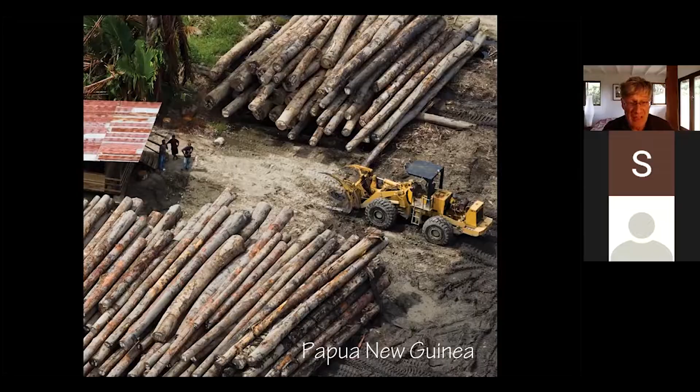We all know about these unstoppable bushfires that are wreaking havoc through the Russian boreal forests, even in the coldest parts of the world, the Amazon rainforests, our own Black Summer eucalypt forests, and America's West Coast conifer forests. Together they combine to add 20% to global greenhouse gas emissions at the moment.

Far too much of the structural and architectural timber that we specify or we use in Australia is sourced in ways that directly and indirectly feed this terrible spiral of global heating, desertification, and forest demise. And then there's also the laundering of illegally harvested forest woods.

Now, I'd like to talk a bit about the forest types from where good and bad woods for your essential construction applications are sourced, where they come from. Let's start with timbers for structural framing and concrete formwork.

Over the past 5 years or so, our big chain trade and retail timber yards have, in on and off waves, shifted their supply of softwood framing timber away from fast-grown radiata pine, which is from temperate climate Australia or New Zealand plantations, and moved towards slow-grown Baltic pine or spruce, much of it from cold climate native conifer and broadleaf forests of Russia and the Baltic states.

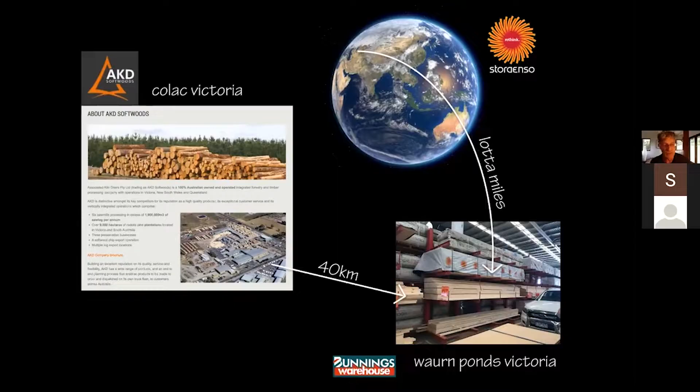The current rate of deforestation of Northern Hemisphere boreal forests, or the taiga, it's the largest terrestrial biome and carbon sink on the planet. This deforestation will have a catastrophic impact on our global climate if it continues. Unless the taiga is preserved to remain intact as largely virgin forest, this biome will soon become a net carbon emitter that alone will dwarf our ever-increasing human emissions.

By reducing tree cover, industrial-scale logging of the taiga accelerates climate change because the nutrient-rich forest soil decomposes under elevated solar radiation with that exposure. That releases carbon dioxide and methane into the atmosphere, which it does most dramatically in the most northern regions with permafrost. This then also impoverishes the biological and moisture profile of soil, slowing and compromising the return of healthy tree cover via natural or planted regeneration.

Repressed regrowth invites invasion of other species, providing ladder fuel for more frequent and intense wildfires. So it's a potent feedback loop of forest degradation and greenhouse gas emission.

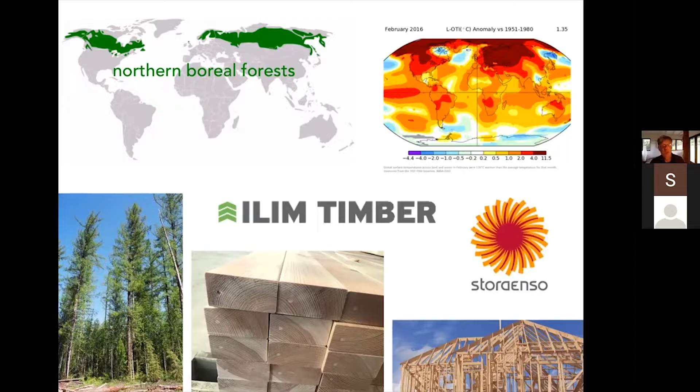Meanwhile, we've got millable radiata, pinaster and slash pine growing in vast, high-yielding plantations across cool and warm temperate climate zones of Australia, in all states and territories except the Northern Territory. And across the ditch in New Zealand, we've got millable radiata pine and Oregon that are grown to quality and quantity that dwarfs ours in Australia. New Zealand has a long and impressive history in silviculture, or tree farming.

Yet much of this millable wood from our region goes to wood chip due to global price wars and just-in-time procurement mantra. So guys, please insist that the pine delivered to your sites is from fast-grown plantations of Australia or New Zealand. Here's an easy-to-follow info sheet from the website for the Mullum Creek Eco Housing Project in Victoria. It'll help you and your suppliers distinguish between the good pines and the bad pines.

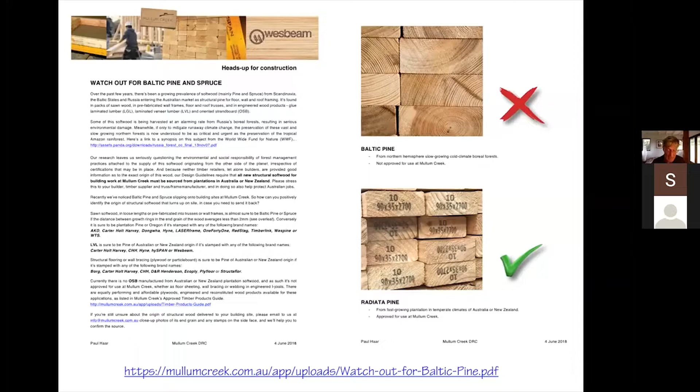Also, please do the same when you order prefabricated floor, wall and roof trusses. If your jobs are in Victoria, here's a Mullum Creek info sheet that'll help you with that.

Now let's look at engineered framing timbers: LVL, glulam, plywood for bracing, OSB and CLT.

These days, I'm struggling to see anywhere on building sites, in Victoria at least, LVL that's not from the other side of the planet. Your dominant Tilling Smart LVL, your Murphy LVL and Rigid Lam LVL are manufactured mainly from Oregon, growing slowly in a mix of cold climate native regrowth forests and plantations of the northwest United States and southwest Canada.

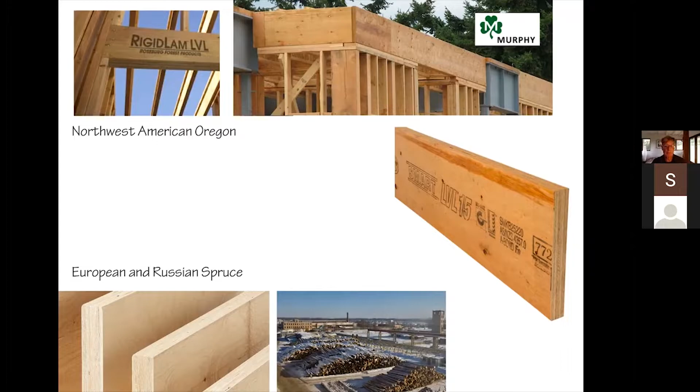Most of the rest of the LVL you'll see on jobs, Spec Beam, MT LVL and Ultra Lam, they're all Baltic pine, spruce or larch from Europe, the Baltic states and Siberia.

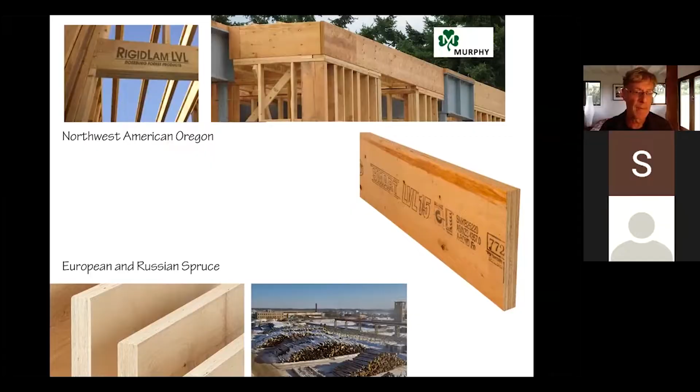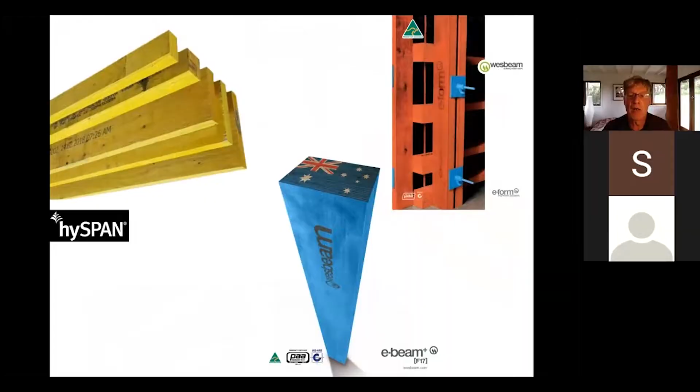Till now you might have seen the odd job around with that yellow LVL manufactured in New Zealand from fast-grown plantation pine, clearly branded as Hyspan LVL. But that LVL plant is now closing thanks to the global price wars I mentioned earlier.

For builders in southern Australian states, that leaves only Wesbeam LVL, which is manufactured in Western Australia from laminates of local plantation maritime pine and radiata pine, but now also, to lift its strength and stiffness, native forest karri.

That karri isn't from plantation, as Wesbeam's marketing videos would have us believe. I'm currently trying to encourage the other two New Zealand manufacturers of LVL, Nelson Pine and JNL, to supply

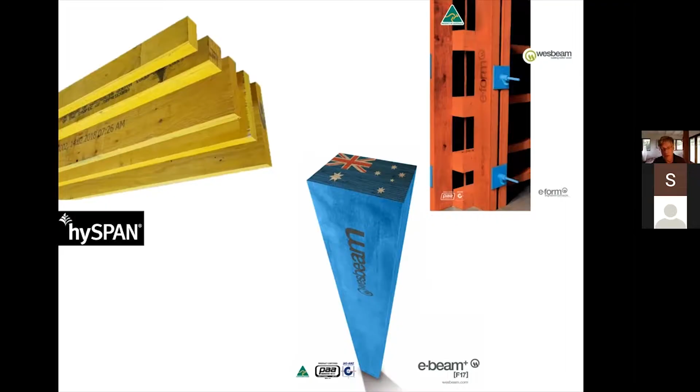pure plantation pine LVL, not only to New South Wales and Queensland, but also to Australia's southern states. But until then, Wesbeam LVL might be the best for you southern builders. Also, oddly, Wesbeam LVL products for concrete formwork, E-form and E-edge, are still manufactured without laminates of karri included, so they're perfectly good to use.

Have a look how beautifully LVL from local plantation pine has been used for this museum in New Zealand. It's a striking and huge building.

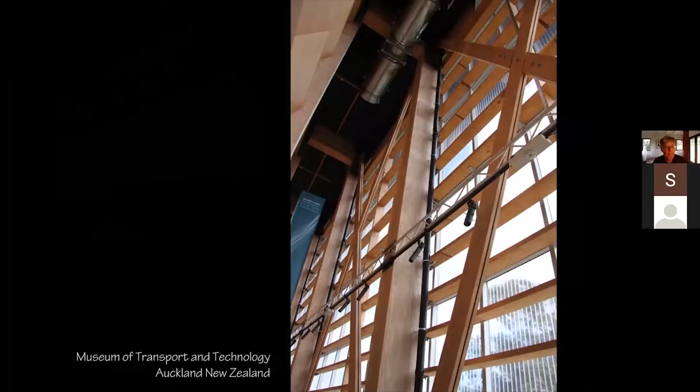For reasons I'll cover shortly, avoid glulam products from Australian native forests, eucalyptus and cypress pine. Obviously also avoid those from Northern Hemisphere Baltic pine, spruce and larch. Stick to glulam from Australian or New Zealand grown plantation wood.

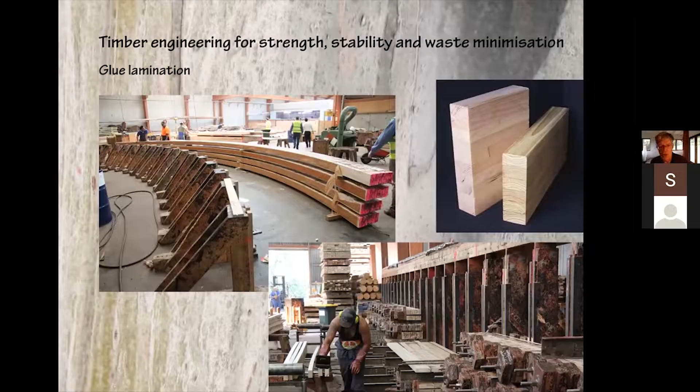There's now also a rapidly increasing amount of unbranded plywood for formwork, structural and architectural applications sold in Australia that's from pine plantations in Chile, and it's all unbranded. Aside from the carbon miles attached to its importation and the serious wildfires that these plantations have whipped right into major cities of that country, you could argue that these price-competitive plantation plywoods from countries with cheap labour are sustainably sourced.

But I prefer to go with branded Carter Holt Harvey Eco Ply, manufactured in New South Wales from local plantation pine, for floor cassettes, panel bracing and other structural applications. And Carter Holt Harvey Formrite, manufactured in New Zealand from local plantation pine again, for concrete form shuttering. The price is much the same in the scheme of things.

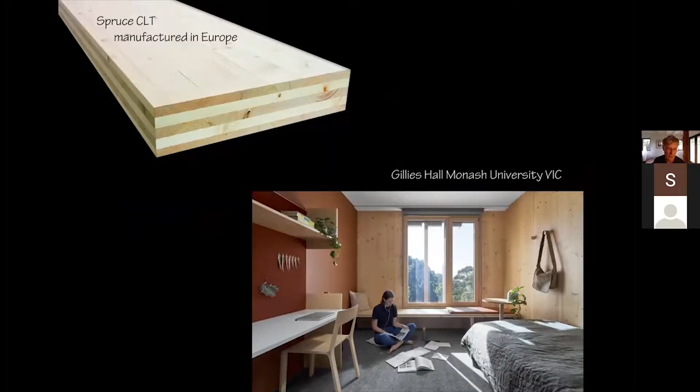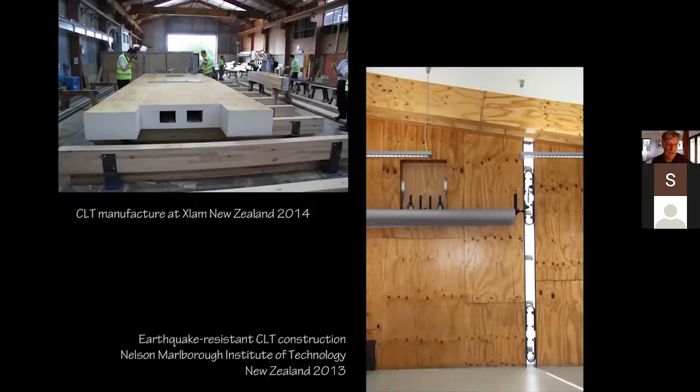Meanwhile, in New Zealand, companies like Xlam have for well over a decade fabricated CLT for sizable and impressive buildings from local, fast-growing plantation radiata pine. More recently, CLT plants sourcing local plantation radiata pine have been set up by Xlam on the Victorian-New South Wales border, by Cross-Lam in WA, and by CLTP in Tasmania.

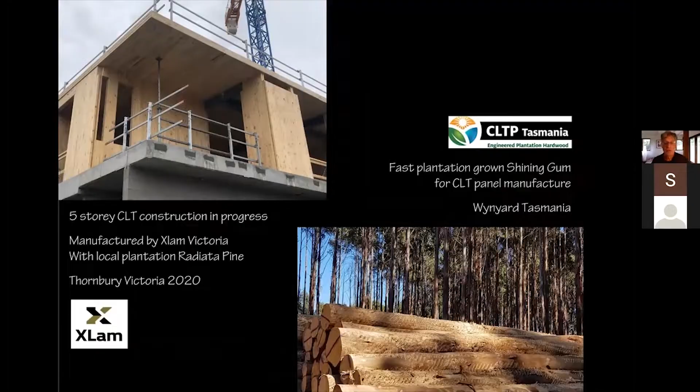CLTP and Timberlink are looking to source shining gum, or Eucalyptus nitens, to increase the structural performance of their CLT and glulam. This shining gum has been super fast grown in Tasmanian plantations in only 10 to 15 years and was originally intended for the fickle wood chip industry. This is a much better outcome, to put it into CLT. So going forward, please support CLTP for your CLT and Timberlink for your glulam if you can.

As builders, I appreciate that if and when a CLT project comes to you, much of the construction detail will probably already be locked in. But CLT builds that I see around the traps are too often also awfully wasteful in their consumption of wood.

If only the upper floor joists and the roof rafters were beefed up a whisker, there'd be no structural or thermal or any other functional purpose that I can think of to the CLT whatsoever. So if you can, don't let your clients and their architects waste wood and money in this way.

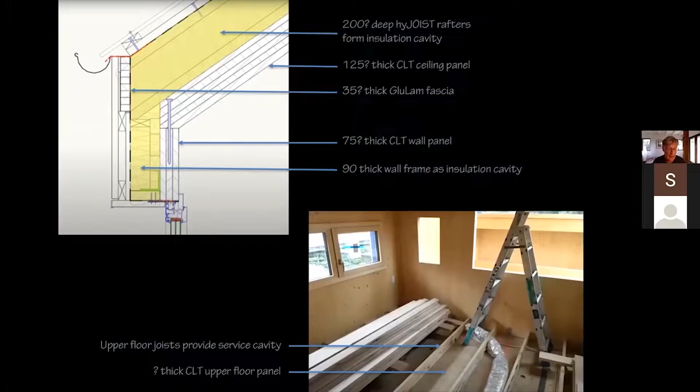For taller builds, where CLT has structural merit, most floor, wall and ceiling surfaces will be battened and lined to provide service cavities, insulation between thermal compartments, and a weather-resistant skin for external walls and roofs. So for a client who insists on the appearance of CLT in spruce, with those finer pin knots, stick with locally grown and manufactured radiata pine CLT with the fatter knots, and just pop over it a sheet of local plantation grown appearance-grade Araucaria plywood in a few spots where this offensive local pine might otherwise show up.

So to wrap up on structural timbers, for builders who deal with this, keep copies of this simple guide in your glove box. It's a green light and red light list of structural timbers available in Australia. It's regularly updated and lives on the Mullum Creek website. Share it with your suppliers, your frame fabricators and your carpenters.

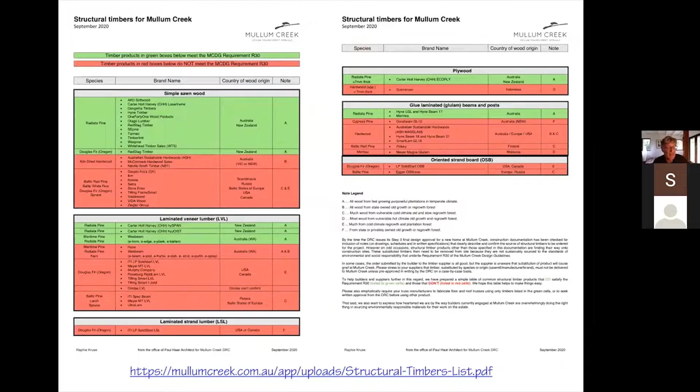Yes, local pine that I'm hoping you'll use for your structures is from monocultural plantations of exotic species, providing little biodiversity value over the prior grazing land they've occupied. However, I have a strong view that we should totally avoid sourcing timber from intact and cyclically harvested native forests, whether in Australia or abroad. That is until forest management operations there can be warranted under emergency environmental laws, which we need, to secure a net enrichment of local and global ecological and social health, patch by patch, year on year, employing new DNA and GPS technology to track each stick of wood from standing tree to stair tread.

You might ask, why am I so radical and uncompromising in my view? Well, it's because we are in an emergency in which the health of our native forests absolutely needs to take priority over any economic or business objectives. There are some eminent climate scientists now saying that protecting these forests may be as crucial to our near-term survival on this planet as stopping our use of fossil fuels.

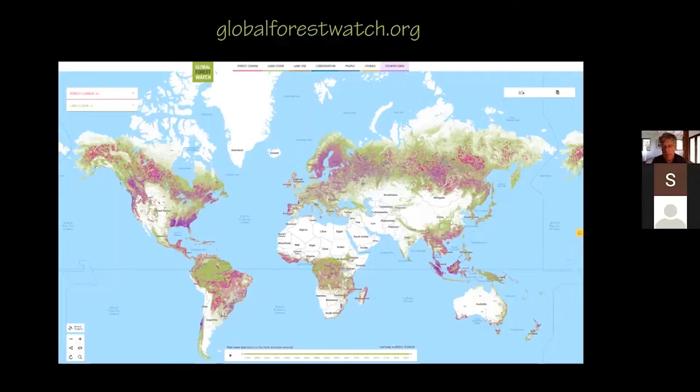So trees in tall, closed canopy tropical rainforests are relatively starved for sunlight for leaf photosynthesis, and soil nutrient for root uptake. They need that to accumulate starch and to grow.

Take these rainforest trees away and you remove a crucial rainmaking water pump from our climate system. You remove this extraordinary carbon store as well as ecosystems that support over half of all plant and animal species on the planet. Add to that the displacement of seeds and soils now exposed to heavy monsoonal and equatorial rains. You're left with nothing to support natural regeneration of anything like what was there for eons before.

In your travels, you may have observed the rubbish that grows back where tropical rainforest has been cleared. We simply cannot continue to build with these rainforest species.

In Australia, it's our tall and relatively intact sclerophyll forests from which the most durable, stable and attractive native hardwoods for architectural applications are extracted. Cyclical clear felling of tall, wet sclerophyll forests in often mountainous terrain depletes biodiversity and other ecosystem services. It encourages pest, weed and exposure-related tree dieback, just like in those boreal forests, and that exacerbates wildfire risk. These damaging impacts are now compounded by a hotter and drier climate.

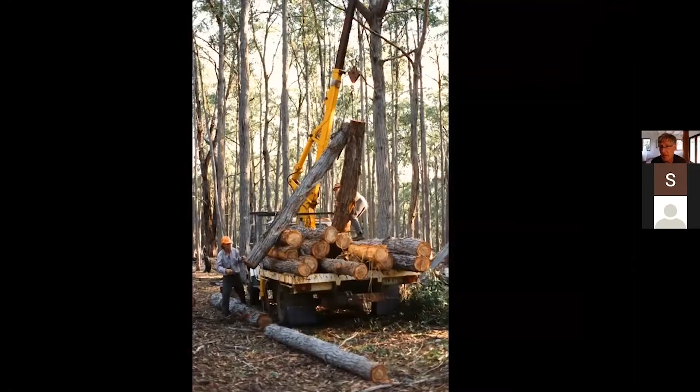Selective felling of dry sclerophyll forests on the often flatter ground is equally damaging, and in the interest of maximising yield for effort, the harvesters tend to degrade the provenance or pick out the eyes of the tree gene pool.

This time last year, our country's high labour costs and slowly rising environmental concern saw at least a good portion of Victoria's remnant native forest protected from logging. Conveniently in these times, we—by that I mean Bunnings—turn again to the tropical rainforests of poorer southeastern Asian and Amazonian countries for the FSC woods that I mentioned before. Having said that, New South Wales has recently remapped its old-growth forests with a view to opening up previously protected areas of state and private forests for logging.

Keep in mind that these southern Australian forests are immensely biologically diverse, and their ability to sequester atmospheric carbon is as good as it gets. Sadly, a year is now a long time for a native forest.

In the wake of our horrific black summer, the Australian timber industry is now poised to mechanically thin those native forest reserves that remain intact. It's proposed in the name of fuel reduction, overriding state powers by decree of the federal government's emergency response.

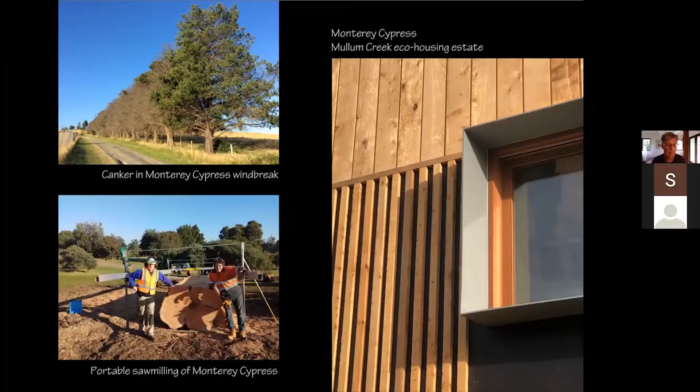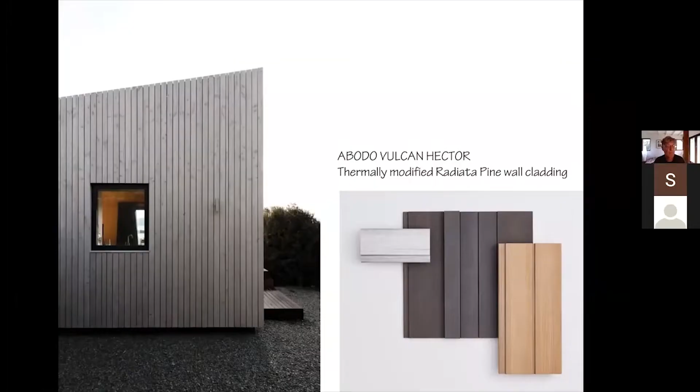Carter Holt Harvey Shadowclad. It's a 12 thick radiata pine plywood manufactured in New Zealand from local plantation pine there. It's treated for good durability and stability with low toxicity, light organic solvent preservatives, LOSP, and with wax impregnation to keep the moisture out. It comes with a flush or groove fine sawn face. I suspect most of you are probably familiar with this product.

Decking. For bushfire-prone sites, sugar gum is a great decking choice. For fire-safe sites, thermally modified LOSP or ACQ-treated plantation pine decking is available, also in knot-free grades, if that's an aesthetic consideration. Abodo and Hyne make a really smart decking of this kind.

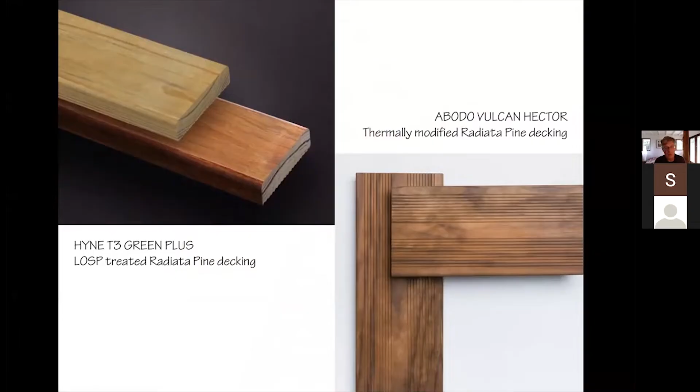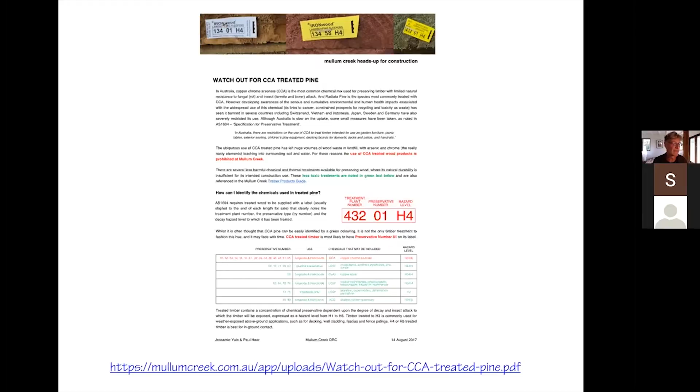If your clients are comfortable with composite wood plastic decking, Modwood is manufactured in Melbourne from local plantation pine sawmill waste and with recycled plastic milk bottles. It's also available with a BAL 40 bushfire resistance flame shield. All other wood plastic deckings that I know of are best avoided because they're manufactured mostly in countries where OH&S around volatile plastics can be poor, and they often draw on virgin forest and petrochemical resources.

Fast-growing plantation hardwoods tend to be relatively reactive to movement as they take up and release seasonal air moisture. So sourcing wood with the right environmental cred for doors and windows, batten screening, flooring and internal joinery is really quite difficult. These are applications that rely on high dimensional stability.

Now, I know you guys appreciate how crucial it is to the performance and service life of external doors and windows that the timber used in their manufacture has terrific stability and durability or rot resistance. Timber doors and windows are big ticket items in a home. But it's also easy to forget that only around 7 to 10% of the cost of this joinery as it's supplied to site is in the wood itself.

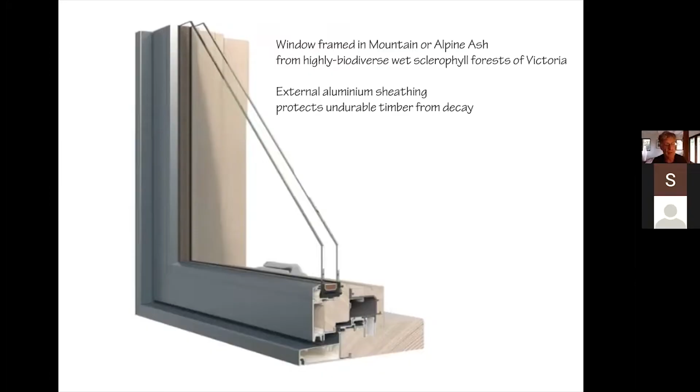By definition, trees of these species need to grow slow and tall to develop wood that, once it's milled and seasoned, will achieve the dimensional stability needed for this exacting application in joinery. We really need to stop extracting hardwood from our tall native forests for doors and windows, as well as for flooring and internal joinery.

Up in New South Wales and Queensland, these woods that are coming out of those native forests include blackbutt, spotted gum, tallowwood, red and grey ironbark. Over in WA, it's jarrah and karri. Recent closure of a few of Victoria's finest tall forests to logging has us now also importing oak like never before in windows and doors, as the wear layer to engineered flooring and as raw seasoned wood for locally manufactured internal joinery.

I haven't yet managed to wrap my head around the environmental cred of oak forest management across Western Europe and the eastern states of the USA, but I understand that some oak is extracted from ancient biodiverse forests of Eastern Europe and Russia, and it's finding its way into Australia. So if you're set on selecting timber products of imported oak, insist at least on FSC certification.

Of course, there are many merchants around who process recycled wood into cladding, decking, floorboards and joinery timbers. Unless the wood you're looking to buy shows nail holes, bolt holes, or other clear signs of being from a prior construction use, insist on a formal chain of custody declaration. It really annoys me that many of these suppliers assure their customers that their wood is all recycled when in fact it's often salvaged or normally logged from regenerating native forest.

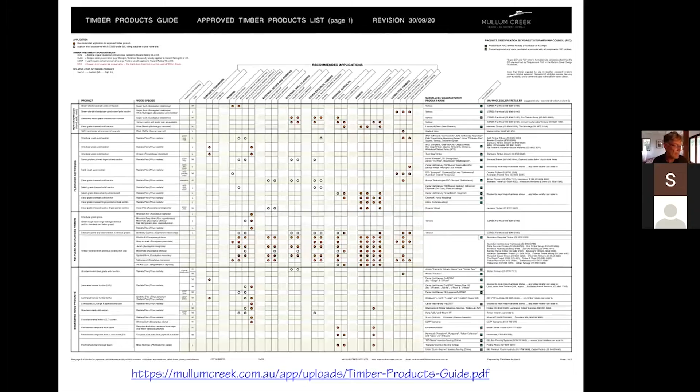If you can work with these, you'll send a strong message to the now global timber industry that you'll entertain only fairly sourced wood. It's a 2-pager, so it takes you through all the different main timber types, hardwood, softwood, recycled timbers, engineered timber products, plywoods, reconstituted wood products, and so forth. And then that's going down the page.

Across the page, you've got all the recommended applications that we've sort of spoken through, and where a dot aligns the columns and the rows, there's a product there on the right telling you who the manufacturer is or the sawmiller, and the wholesaler or retailer where you can get that wood. Now, if suppliers or the websites they have tell you that their wood is sustainable and it's not on this list, you can be pretty sure that they're telling you a porky.

A decade of pretty intensive research has gone into preparation and regular revision of this list and the other Mullum Creek timber info sheets that I've flagged with you. If you're still unsure about a product, please let me know. We're desperate to add responsibly sourced timbers to this list, and we acknowledge that our gaze on Australian-grown wood might be a bit biased to the southeastern states where we practice.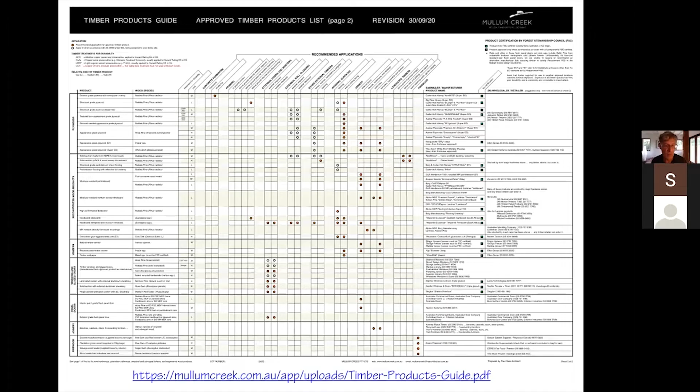At Mullum Creek, we've been really pleased and a little surprised with how designers, and particularly the builders, are with minimal resistance embracing the sustainable timber products we're requiring them to choose from. And we know they're carrying this product awareness onto their other jobs as well, which is great.

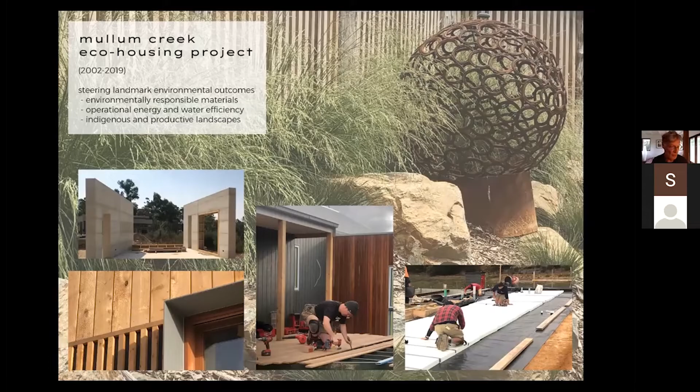I'll quickly show you the kind of environmentally responsible timber selection I've been on about and how that can come together. Here it's in a job of mine from a while back, an earth-covered library and wildfire shelter for Candlebark School in the Macedon Ranges. It has a lot of wood in it, and it's all sourced from Australian plantation softwood and recycled hardwood.

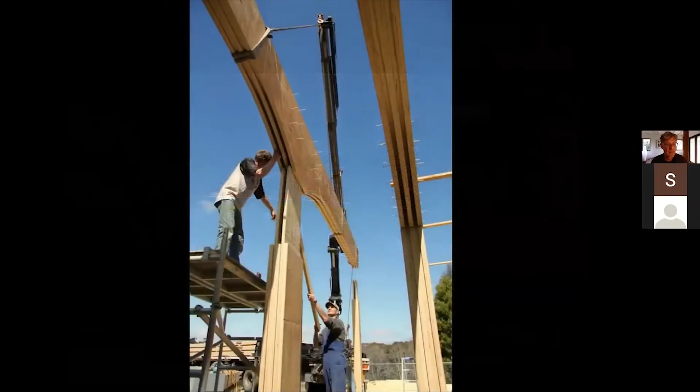So the timber portal structure supports a weighty ½ metre of earth over it as cover, which in turn provides impeccable shielding from the bushfire's radiant heat, if one were to come. It's a deconstructible, screw-laminated portal of interlocking 35 and 45 thick LVL billets of only plantation Pinaster pine. So it's from Wesbeam in the days before they added the native forest karri.

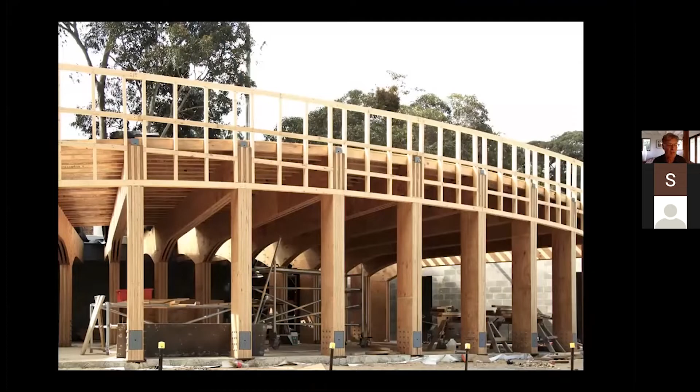All offcuts from the LVL billets were ripped into purlins, which in turn were screwed down onto the portal beams, so there was no wastage there. And before then, these LVL purlins and the structural plywood roof substrate, which is Carter Holt Harvey Eco-Ply, had a pre-use as temporary formwork for a concrete slab beam that provides lateral restraint to the curved reinforced concrete block retaining wall.

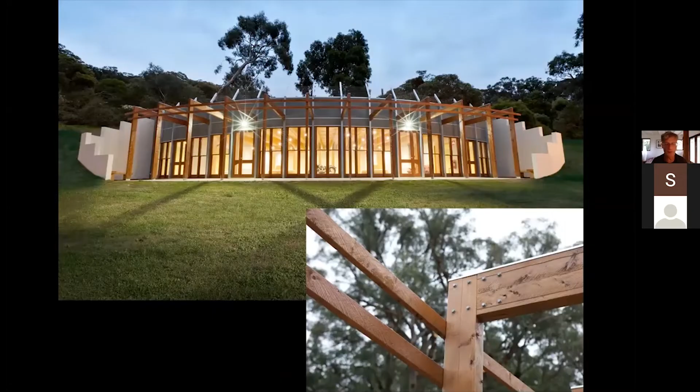It runs around the outside. The window wall is framed in New South Wales blackbutt, recycled from a Sydney warehouse, a wool store, I think it was. The pergola out front is rough-sawn farm-grown Monterey cypress. It's a non-structural landscape element, so it didn't need to be BAL-rated. And the ceilings are hoop pine, Araucaria cunninghamii. So plywood that's manufactured in Queensland from local plantation wood.

Over the past 5 years, pretty well everyone in my office has volunteered to team up with CERES, the Centre for Education and Research in Environmental Strategies. It's in East Brunswick, Melbourne. And they've done that to extend the timber initiative from Mullum Creek into the launch of a new social enterprise, CERES Fairwood. The profits of CERES Fairwood all go back into CERES Community Environment Park.

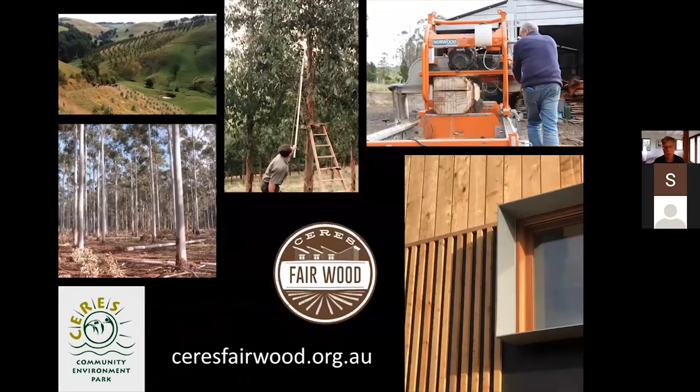Fairwood removes itself from the adversarial native forest debate and opaque environmental certification schemes. Peter and Hayden at Fairwood, they aggregate and retail timber inside short local supply chains with Victorian and Tasmanian tree farmers and portable sawmill operators who they know personally. These are mostly small producers who are geographically dispersed and struggle to find, sell and deliver to a market that fully appreciates the farm-grown trees and timber that they have on offer.

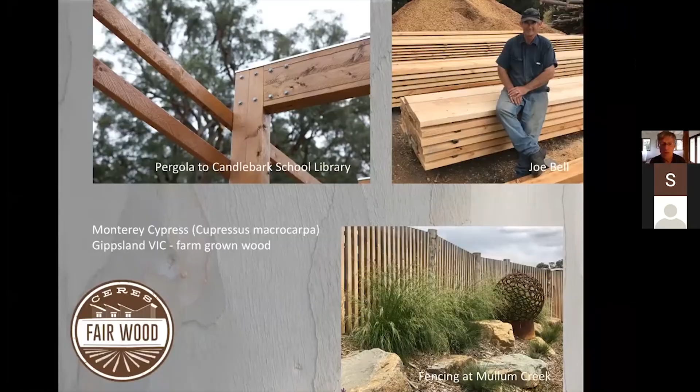Fairwood buys only from growers and millers who source wood to the highest standards of environmental and social responsibility, as informed by the Mullum Creek project. It shares their stories directly with its customers, building and landscape contractors, furniture makers and DIYers. Fairwood builds direct friendships and understandings between city and country folk, and it encourages farming families to revegetate their bare paddocks with trees for conservation and for profit.

On its website, you'll see that Fairwood has a limited selection of local farm-grown and salvage woods available as decking, wall cladding, flooring, joinery, and landscape timber. It's only recently acquired a substantial warehouse that will now allow it to gather larger and broader stocks of very responsibly sourced wood.

And finally, as Jessie requested, here are a few broader tips from me to builders who declare.

At its core, sustainable building construction must be of excellent quality across and between all trades. Smart detailing and fine workmanship are key. Without it, building fabric is wasted to premature failure and replacement. So when it comes to carpentry and joinery, for example, the technical design guides prepared by Wood Solutions are an excellent resource. They really are. Just be mindful, though, that they're environmentally agnostic in the way they promote all wood products because they're directed by the Forest and Wood Products Australia.

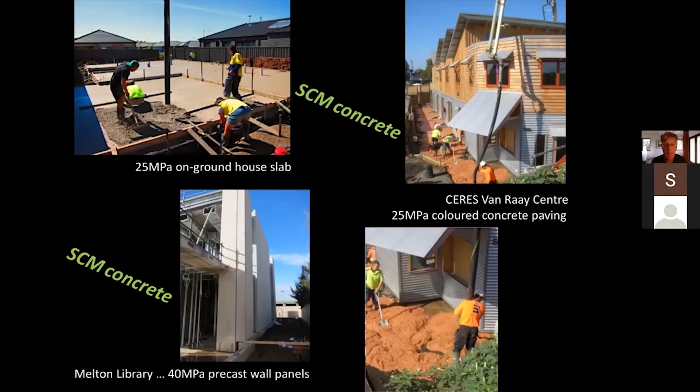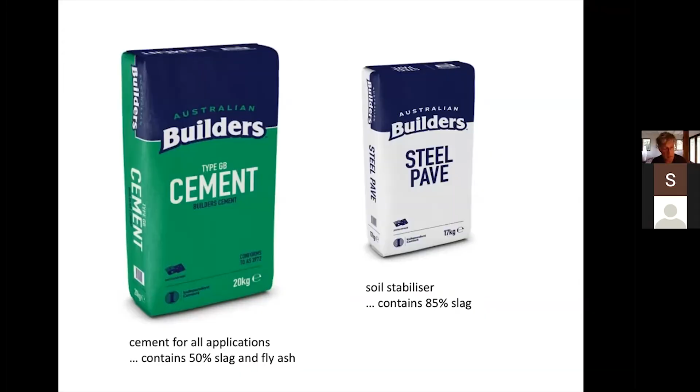These alternatives for wet mix concrete, as well as bagged cement, are now readily available in Australia, certainly across our major cities, at the batching plants and at your timber hardwares. To massively reduce the carbon footprint embedded in your builds with a no-cost, no-brainer, order concrete and cement with SCMs and refer to the Mullum Creek Concrete and Cement Products Guides to make it a complete cinch for you.

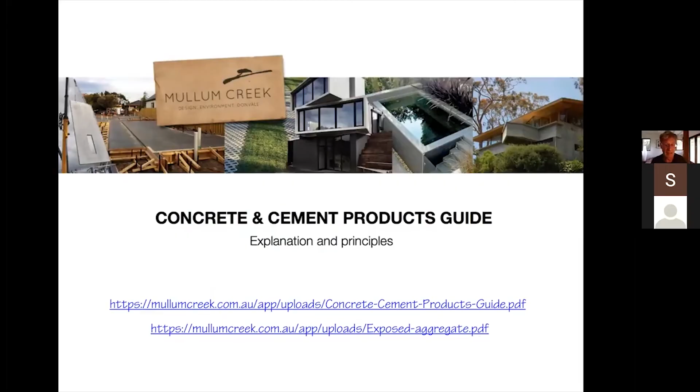If you can bear to put up with any more from me, tune into this YouTube of a webinar I presented to Architects Declare back in April. It explains why materials that go into construction account for the lion's share of the total life cycle environmental impact of buildings.

Until we can produce materials that are without such negative ecological and climate consequences, let's subscribe to less is more and foster quality over quantity. If you're able to, plead with your clients to build small, explain why, and encourage them to re-love what they've already got.

Another tip: delicately rework existing buildings where you can. Apply your finest skills to minimise natural resource depletion and to give our planet a chance to heal itself. Accept that a gentle touch may not catch the eye of today's glossy magazines, but know that future life on Earth will be thankful for it.

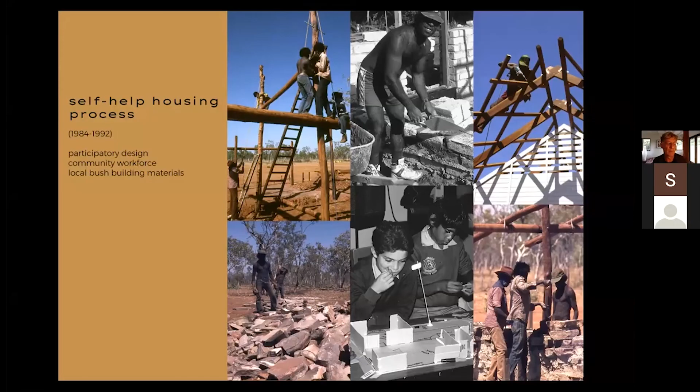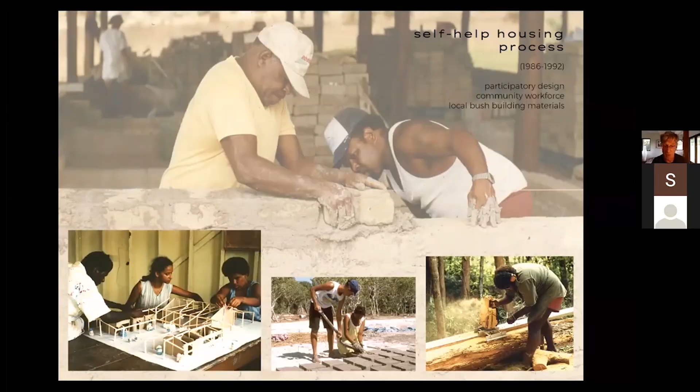I spent the first 10 years after uni up north, helping Indigenous communities to design and build for themselves, using materials straight out of the local bush. It was stacks of work, but these people had time on their hands and they were keen to learn. By this self-help approach to building, they got to own their own homes. They built these homes at a tiny fraction of the cost of the government homes they'd been renting. And it also built community and social resilience.

So for me, these days, I tend to get knotted up too often in unnecessary complexity. And my final tip: share what you learn freely. Do it desperately and urgently, because this is an emergency. So thank you, everyone.